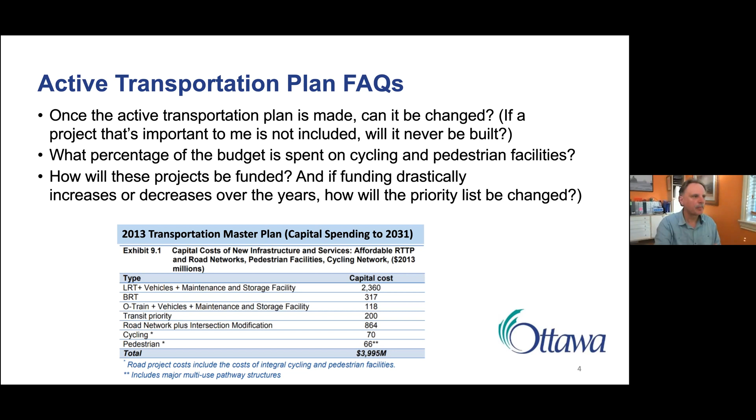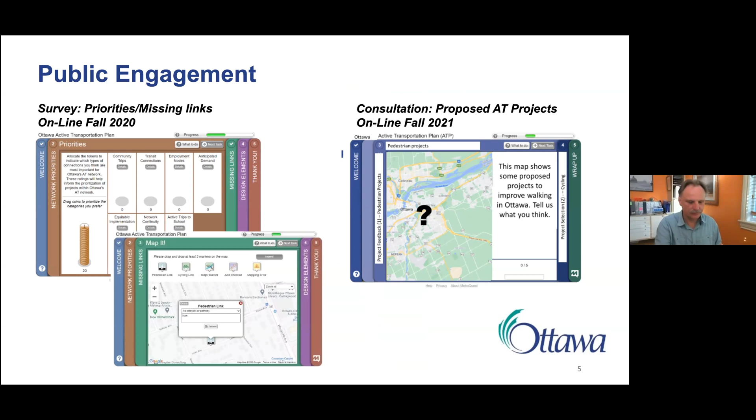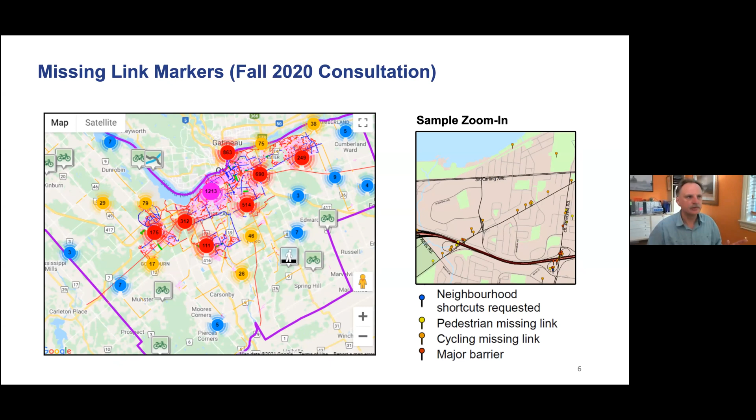One of the major comments and challenges we get when we talk about our cycling plan, because it's very much a network-based solution, is: don't you know the bike lane ended right here? Why don't you do the whole thing? Why do you only do one bit and not the whole thing? Sometimes it does take a number of years of effort to complete a route, but the key is that we've decided on a network to focus on. That doesn't mean we work on it exclusively, but we try to focus on completing connectivity along this bikeway network.

And I think we've been quite successful in doing that. In fact, some of these yellow lines that are not yet completed would be done immediately, for example, when the baseline BRT comes in. So if we include what we've built and what's in the pipeline, I think we've come very close to having good completion rates.

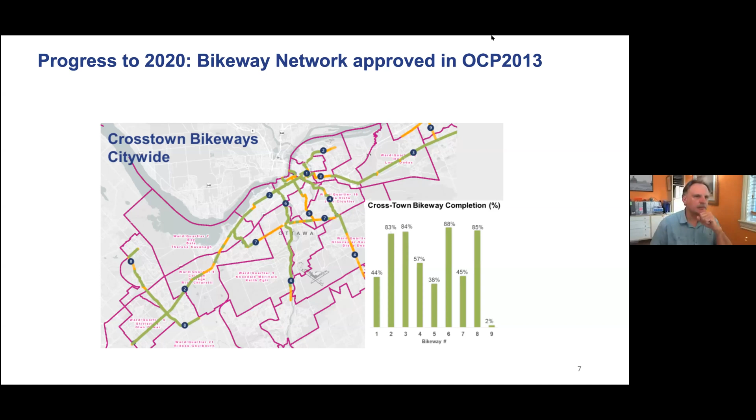If you look at the overall program, there's a lot of focus on how many kilometers of facilities, although I think what we want to emphasize a little more is the quality of the facilities. That includes, I believe, being the absolute leader in Canada, if not North America, in protected intersections, and we're building many more. We've had a very successful PXO program to help people cross roads, and although it only started a few years ago, we've built a large number of them. It's been a great tool to make things far easier for pedestrians.

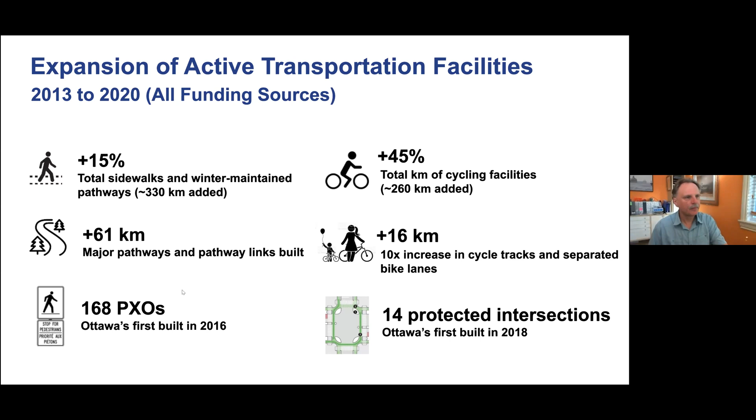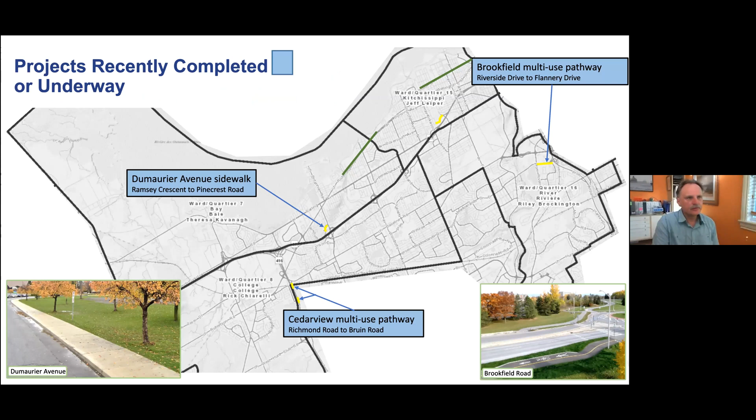If you look at the ward grouping we have with us tonight, and look at recently completed projects within the last year or two, there's a few, as you can see on the map here, and hopefully many of you have had a chance to experience them. But there's also a large number of projects in the queue, to be either completed this year or in the next year or possibly two, basically within the next 2 years. And this is over and above what we may add in the new plan over the 10-year period.

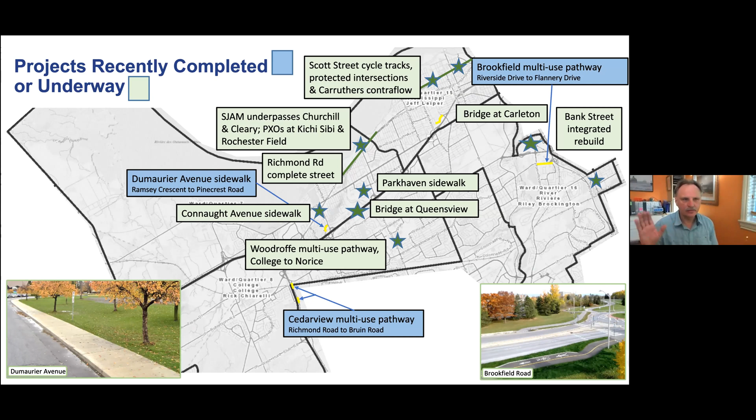Looking at some of the big new initiatives within this ward grouping, I think one of the biggest ones is our opportunity to improve active transportation and reduce the level of stress across these 4 major MTO crossings of the 417. The degree of the rebuild is very significant. The MTO thinks that the work they're going to do should last 75 years. So this is an opportunity we don't want to miss.

Fortunately, we have been working with them for years now, since 2018, to work out the kind of design we'd like to see over these structures. So this is coming on pretty quickly, and the MTO wants to start construction depending on which overpass.

Can you say what MTO is, please? The Ministry of Transportation for Ontario. They are the highway authority - they own and pay for all the highways in Ontario, the 400 series and many other non-400s. So basically they're the provincial transportation authority. Their responsibility includes not only the highways, but the overpasses and interchanges. However, from a policy point of view, they don't pay for cycling facilities, so there's a negotiation that has to go on, and we may have to chip in towards these crossings.

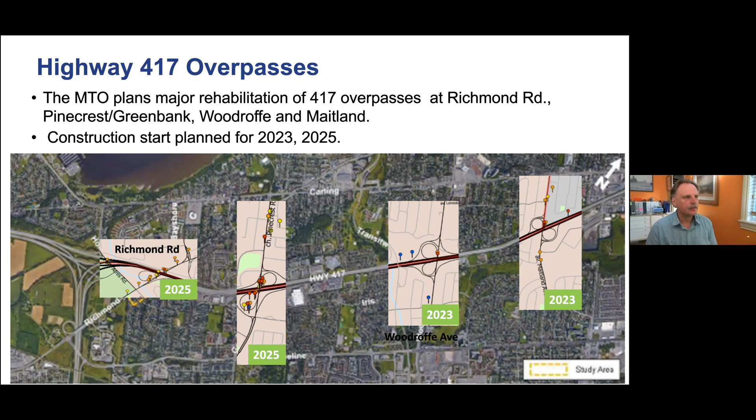Here's an example of one of those 4. This particular one, an EA, was completed a couple of years ago for Maitland. You can see it looks very different than today. A lot of the geometry of the ramps has been squared off so that you're not dealing with super high speed turns where, from a cyclist or pedestrian point of view, they come at you from your back shoulder. To the degree possible, protection is provided - a separation and a curb from traffic. It's a very different experience than crossing this particular overpass today. We should find out soon, in the next months, exactly how this is going to work out, and I think it'll have a big impact on our plan going forward.

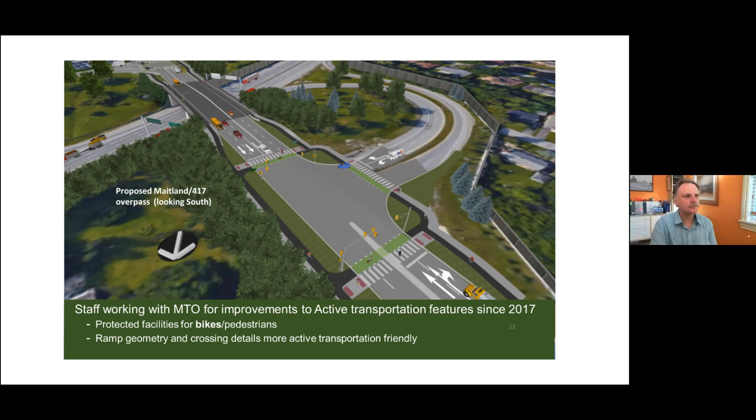This is an example of one of the bikeways we've been focusing on. If you look at the section from Scott Street to Saint Laurent, this is about 12 kilometers, and we have spent 7 years working on that in a concentrated effort to get to 100% basic connectivity.

There's a bike lane where it's needed, and since then we've done a lot of qualitative upgrades in all kinds of ways. For example, even Hemlock was resurfaced with buffering, and we continue to add bike tracks along Beechwood and lots of protected intersections coming along Scott. That's the importance of having a corridor that you define - this is an important cycling corridor.

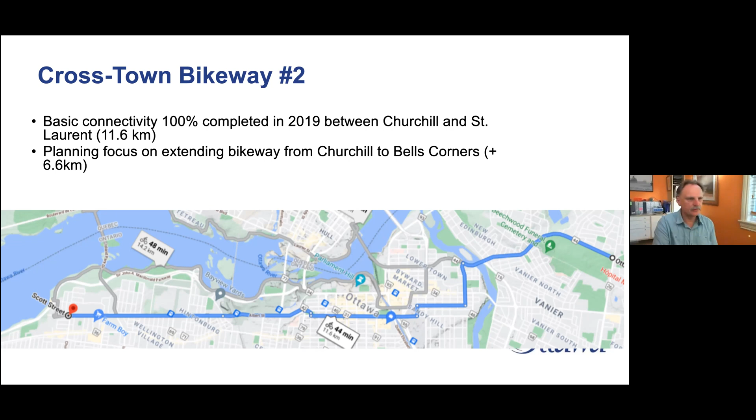So looking forward, what are we going to focus on next? Well, the quality improvements aren't stopping along this particular part of the bikeway, but we're also going to initiate an extension of the bikeway to Bell's Corners, up to Acres Road. If you look at this section, there are already a number of projects in planning. At Golden, we hope to get a better intersection, including a direct link up to Scott, so you avoid the very congested area of parking and shopping through Richmond Road.

Further along, stage 2 is going to build completely protected bike tracks after they're done their trenching and so on for their project. There's also a resurfacing project going on all the way from Bayshore Drive to Pinecrest, and we're going to look at putting bike tracks there and improve sidewalks, which is much needed. Bayshore Drive interchange is being reworked by stage 2. As I mentioned earlier, the MTO is looking to rehab this overpass over the 417, and we want to get a safe facility there that ties into all the other work we've been integrating along the corridor. There'll still be some missing links that we'll consider in the new plan, but quite a bit of this is already underway outside of the new plan.

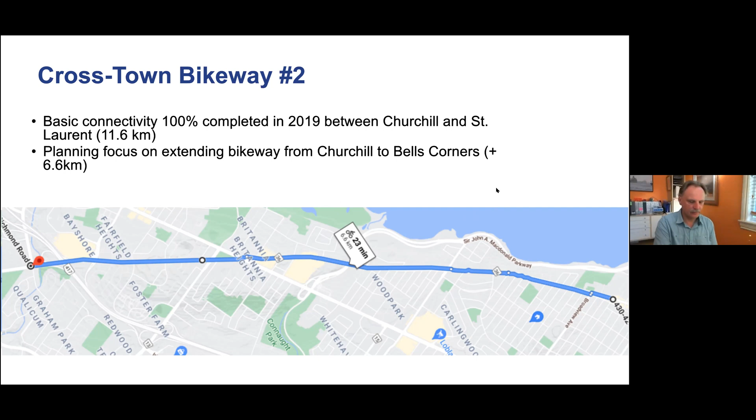One of the most significant and impactful projects will be the active transportation upgrades once we get the baseline BRT project underway - it is a massive project with great continuity, a nice straight route. It will have, as you can see in these drawings, proper facilities, bike tracks, separated spaces for pedestrians. It's also going to solve some very difficult, hard to get from A to B challenges, because there'll be a facility connecting from Fairlane up to Merivale. It is true this particular project, although we're virtually done the detailed design, is not funded, but it's obviously high on everybody's priority list, and it will be extremely impactful once it's funded and built.

We also have some questions that were raised about connectivity in this area. We'd very much like to see - if you look at these links - your comments, those of you familiar with this area, in the chat, in terms of where we should prioritize, where the links are that we need to prioritize, keeping in mind that we should have something on baseline once this major project occurs.

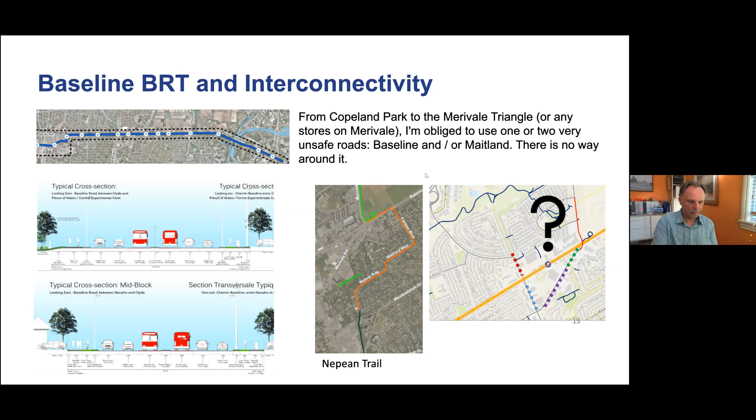One issue that came up, and Councillor Kavanagh you'd be very familiar with this one, is the challenge in going north-south across Carling between the transitway and the place where Richmond Road crosses Carling. There's a massive redevelopment going on of Lincoln Fields Shopping Centre, and we've opened up discussions, thanks to the councillor as well, to open up the door. So far they're interested in seeing if they can improve the north-south connectivity. I think this would be a huge benefit, since it's very difficult otherwise to see how we can make progress given the road grid there. So we're very much following up on that, and hopefully we'll have some news if the discussions go in a positive direction.

There's a couple of questions here that we hear often. One that comes up quite a bit is the friction and conflict of cyclists and pedestrians on pathways. Obviously that's often a comment made about the NCC pathways, particularly in these times when everybody's out. The NCC, if you've looked at their new strategic plan which came out in 2019, has a definitive plan to either widen or separate cyclists and pedestrians. That won't happen instantaneously, but they are definitely looking at that, and they accept that it has to happen. I'd also say that as the city builds out a reasonably attractive on-road network that's more direct, we're taking some of those cyclists, particularly the ones going a little too fast, off of the pathways. We've actually seen that impact in the numbers from our counters, if you compare the Scott-Albert-Laurier corridor with what's happening on the Ottawa River pathway.

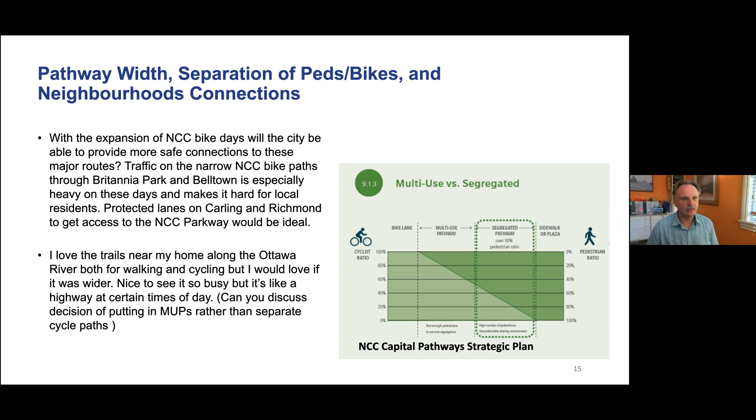The business of getting along in terms of the behaviors of cyclists and pedestrians is certainly a long-term challenge, and I do agree it's a matter of getting new behaviors in place. It's always interesting that cyclists get annoyed when someone buzzes by in a car, and they may do that to a pedestrian on the pathway and just not appreciate the negative impact that causes. So we've been doing various kinds of programs along with the NCC, trying all kinds of different things. Ultimately we just have to get the social connection and message across. I don't know that ordering people to do things is going to be super effective, but changing the mindset is something we're certainly going to try to do, looking at best practices in other cities.

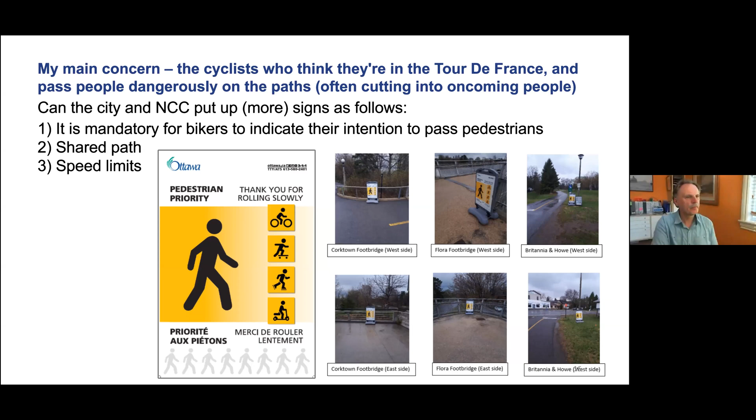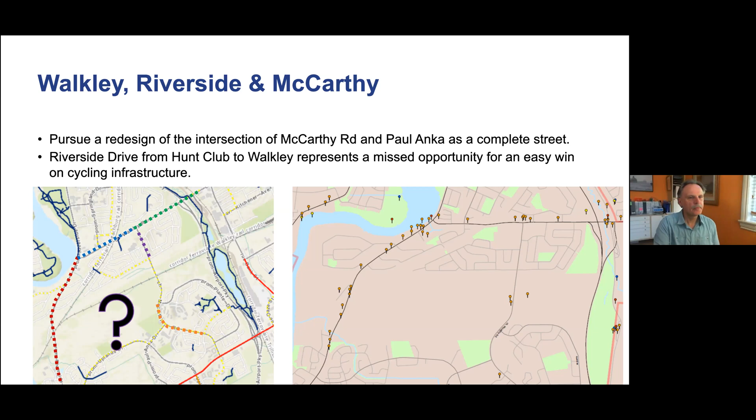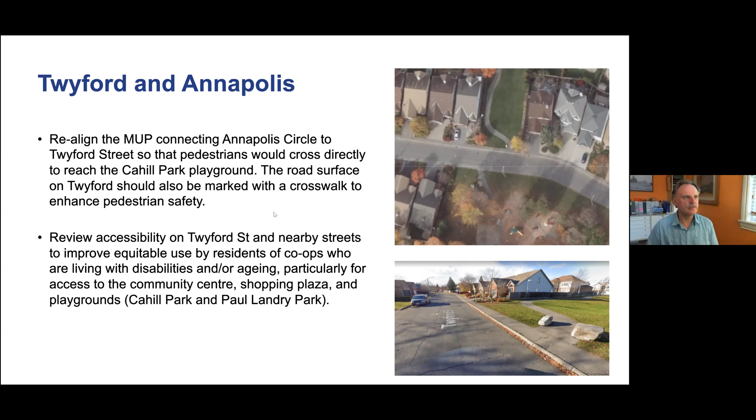A very specific question about a rather obvious issue, I don't know if I could find the person that did this design originally. I'd certainly like to ask them why there was an offset. Perhaps there was a good reason for it at the time. But this is something we could tackle. We have a program to put in accessible crossings that include not only the curb cut, but a tactile strip, and we could consider a PXO here depending on traffic levels. I think that would be an example where one of our smaller programs, which does projects all over the city, could be very effective. And if there are specific locations that are priorities, they can be submitted to us through the councillors or directly to staff.

For those of you familiar with what's been evolving with e-bikes, particularly in terms of what's allowed and what the policies and rules are, they are starting to become far more common, and we're going to see them more and more. They're lagging in North America compared with Europe in terms of ubiquity, but that's going to change.

The comments about surfaces, I mostly get this on sidewalks that, let's say, were often asphalt paved years and years ago and tree roots have buckled them. They're extremely difficult for many people, particularly if walking is somewhat difficult. We are speaking with our asset management staff. Maybe we need to reconsider when those things are redone. When they're rebuilt, typically they're rebuilt in concrete, so there'd be much better surfaces. However, unfortunately, there's a big backlog, and that's more of an asset management issue than a planning issue, but we do want to be involved in that policy setting about quality standards.

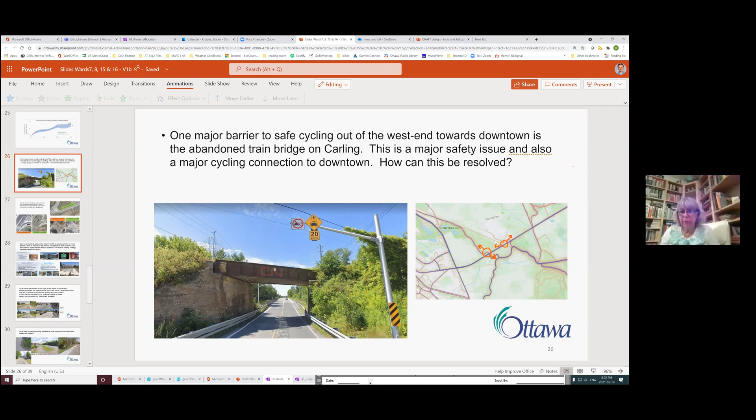So we have, I'll let Zlatko and Deb wrap up on what's next for active transportation planning with the city.

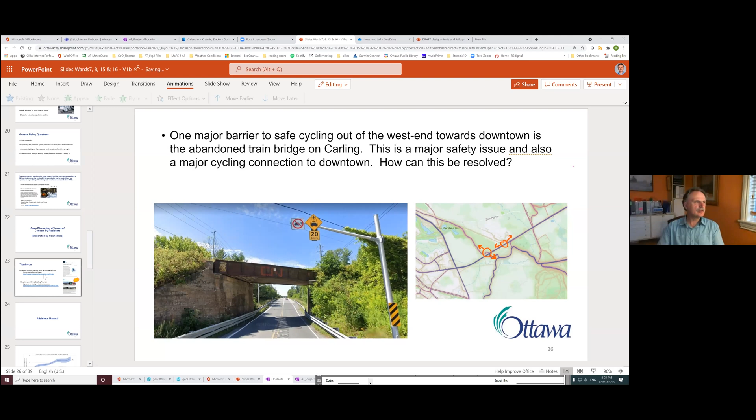All right, well, I think the last note we have, I don't know, I seem to have lost my ability to share the screen. Have I? Anyways, perhaps Deb, you can add in the chat the links to the TMP plan update process.

We have a website called Engage Ottawa so that you can keep track of all these steps and when the debate moves to finances or mode share and so on. We also have a newsletter called Cycling in the City, and that shares with you all the new projects that we have across the city if you're interested to see what's happening.

In terms of the next step, we are looking for the councillors' priority feedback, hopefully by the end of this month in terms of projects. Then we're going to go off and whittle down that list so we can present to the public what we think should be in the next 10-year plan.

That will have lots of headroom, as a councillor mentioned, in case we get additional funding. And that is what we're hoping to show in the fall. People can then comment on those proposals.

Thank you for that reminder. Keep your wish list coming. We have to send our wish lists in, but our wish lists are really your wish list. So let us know. So that drop dead date, is it the 28th? Correct. Okay, yeah. So we'll send in. Keep on dreaming, we need more of it.